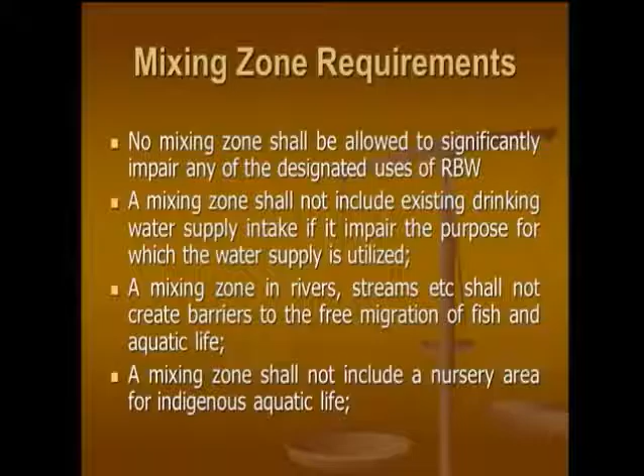Okay? This RA 9275, as mentioned, also stipulates mixing zones. So what are some of the mixing zone requirements? No mixing zone shall be allowed to significantly impair any of the designated uses of the receiving body of water. A mixing zone shall not include an existing drinking water supply intake if it impairs the purpose for which the water supply is utilized. A mixing zone in rivers, streams, etc. shall not create barriers to the free migration of fish and aquatic life.

This is where the margin is applied. Then a mixing zone shall not include a nursery area for indigenous aquatic life. Now, there's a specific computation on how to determine the mixing zone. Because just like the trend in industry for air emission, before, they do what? They increase the height of their stack. And therefore, the government had set a standard of 300 meters.

So in this case, the same thing. If this is your wastewater treatment plant, there should be a certain limit only. So you cannot extend beyond. Aside from, of course, it's not sustainable because you will be having a lot of cost in installation of the pipeline. Now, also in the mixing zone, there should not be, as mentioned in the provision, an impairment in the discharge. What normally industries do is this.

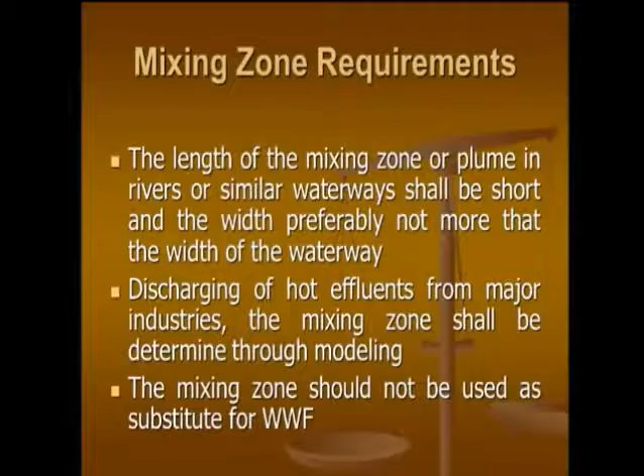So here, in continuation of the mixing zone requirements, the length of the mixing zone or plume in rivers or similar waterways shall be short, and the width preferably not more than the width of the waterway. For discharging of hot effluents from major industries, the mixing zone shall be determined through modeling. So probably you could also apply the Gaussian plume model, wherein you set the delta X, the delta Y, and the delta Z of the source. And the mixing zone should not be used as a substitute for a wastewater facility, just like the putting up of the diffusers.

Okay, you have these following provisions and restrictions. It is summarized such that each industrial plant should have a wastewater treatment facility. And you cannot just simply discharge anything to the body of water without treatment.

Okay, all wastewater control facilities shall be properly maintained and operated, and thus they have to have a permit. Remember what kind of permit do you get for the wastewater treatment facility? Discharge permit or DP. Wherein quarterly you have to submit an SMR. What's an SMR? Self-monitoring report. This one, no person is allowed to construct systems if the purpose of which is to conceal or dilute an effluent discharge.

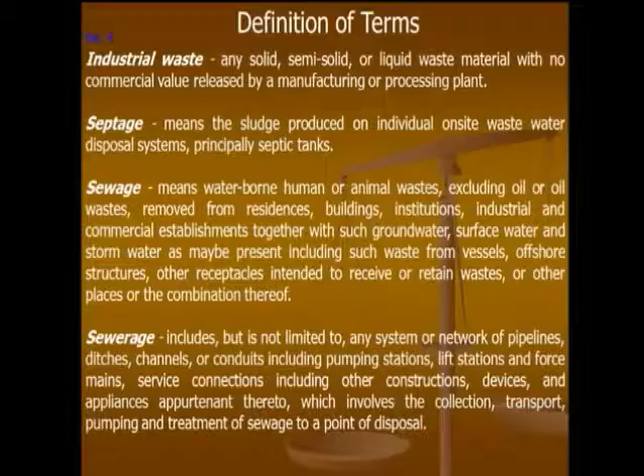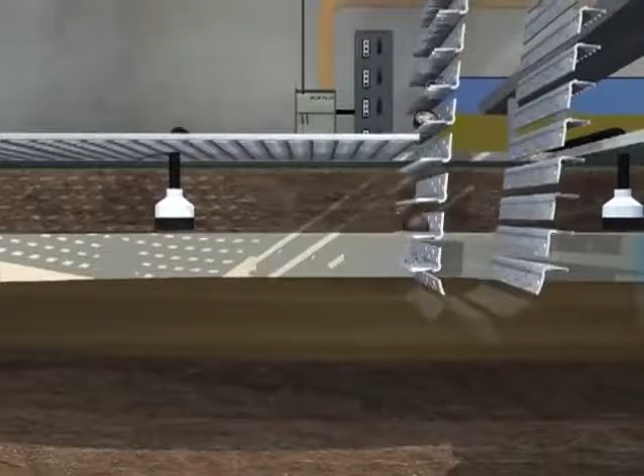Okay, some of the implementing rules and regulations we have already covered, but okay. In your definition of terms, they have defined in the provision what's an industrial waste. So it's any solid, semi-solid, or liquid waste material with no commercial value released by a manufacturing or processing plant. Now, this is also interesting that the provision has differentiated what's a septage, a sewage, and a sewerage.

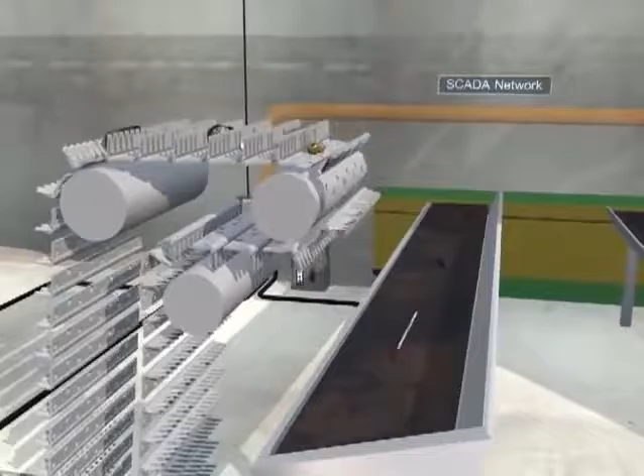What's a septage? It's the sludge produced on individual on-site wastewater disposal systems, principally septic tanks. What's a sewage? It's waterborne human or animal waste, excluding oil or oil waste, removed from residences, buildings, institutions or any establishments. So that's the what? Wastewater from the source without treatment. That's why your wastewater treatment facility is also known as sewage treatment plant, STP.

Okay? But what is a sewerage? A sewerage is the system itself, or the network of pipelines, ditches, channels, or conduits, including pumping stations, lift stations, and all, to treat the influent to have the effluent. Did you get it? So those are the definitions of septage, sewage, and sewerage.

Now, who are the government agencies responsible in the implementation of RA 9275? You have the DPWH. That's the reason why DPWH is involved, because they are the ones involved in the installation of pipes. Okay, so when Manila Water, as concessionaire of water, would install pipelines, they would coordinate with DPWH. Okay, then DOH, this is for the standards.

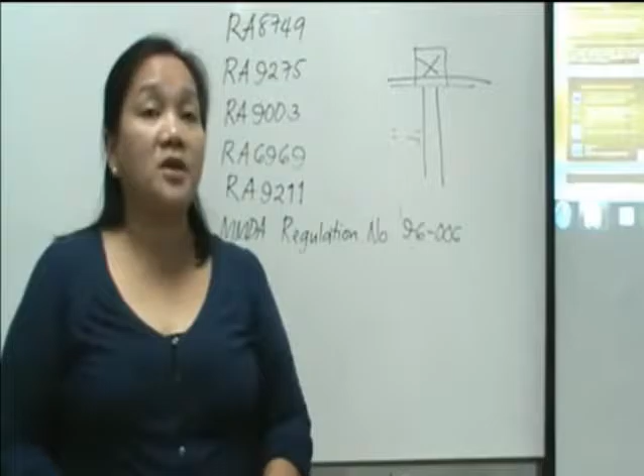But now, it's already part of your bill. That's why if you take a look at your bill, either from Maynilad or Manila Water, there's a sewerage treatment charge. According to the computation, it's about 50% of your charge. So let's say you are paying 100 pesos per cubic meter, technically you will be charged 150 pesos per cubic meter because of the treatment of the sewage. Then of course, some LGUs are also mandated to take care of some provisions of RA 9275.

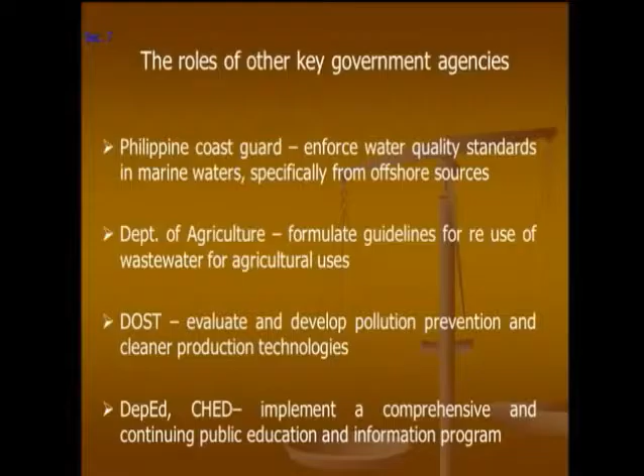Also, there are some roles of other key government agencies such as the Coast Guard, which, as I mentioned, make sure that there are no biomedical waste or hazardous waste that can contaminate our Philippine area of responsibility in terms of bodies of water. Department of Agriculture, to ensure that the irrigation system would not be contaminating our bodies of water. DOST would be for the development of pollution prevention and cleaner production technologies. DepEd and CHED would be for the comprehensive and continuing public education and information program.

Now, under MWSS, you have Manila Water, as well as another, which is the Maynilad Water System. So you have to know what is MWCI and MWSI. These are the two concessionaires given authority to provide water and treatment of the sewage, only in Metro Manila. How about if it's beyond Metro Manila? The local water district, which is governed by LWUA.

Now also we have here the cleanup operations, for the mechanism on how to claim the cleanup cost. As mentioned, there is a computation on the wastewater discharge fee, okay, depending on the concentration that you have exceeded.